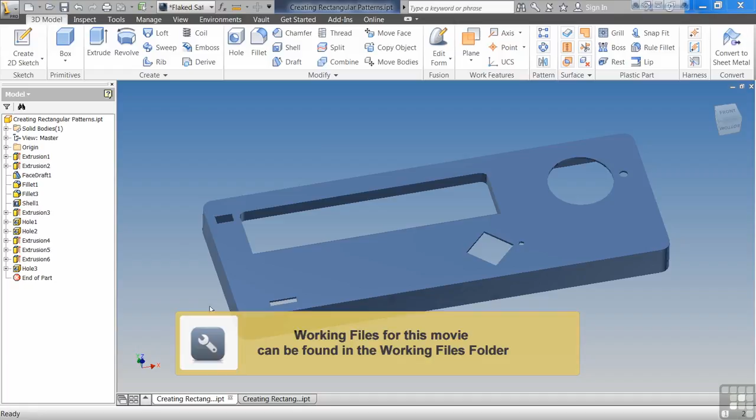In this exercise, we're going to be discussing creating rectangular patterns. Rectangular patterns are part of a feature reuse series where you have rectangular patterns, circular patterns, and mirroring. It's been attributed to Picasso that good artists borrow and great artists steal, and it's the same for your work inside of Inventor. If you take the time to draw something out, why draw it out all over again when you can just pattern it?

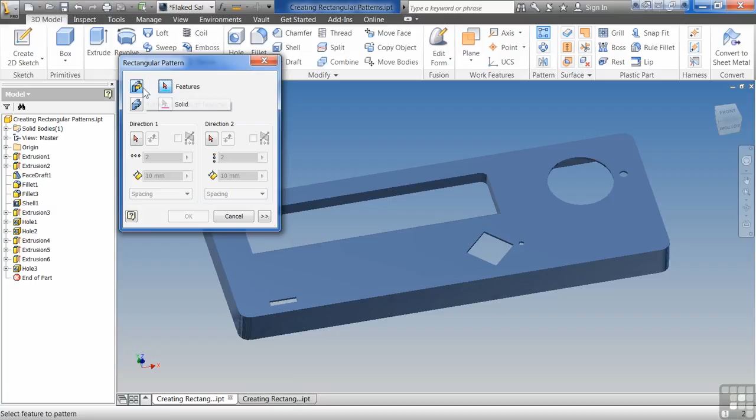So let's get started. Pattern command. You have the rectangular pattern appear at the top, once again top to bottom, left to right. You can either pattern the individual feature or you can pattern a solid. Most of the time, we're going to be patterning an individual feature. So we'll come down here and we'll select rectangle here.

Then it asks for a direction. One tip to you is grab something that's easy to get a hold of. To me, this line here is much easier to grab than some of these rounded edges. So I'll grab this line up here. You'll notice right away that it went in the wrong direction, the little arrow's going the wrong way. So I can just flip it and it'll say, hey, go this way.

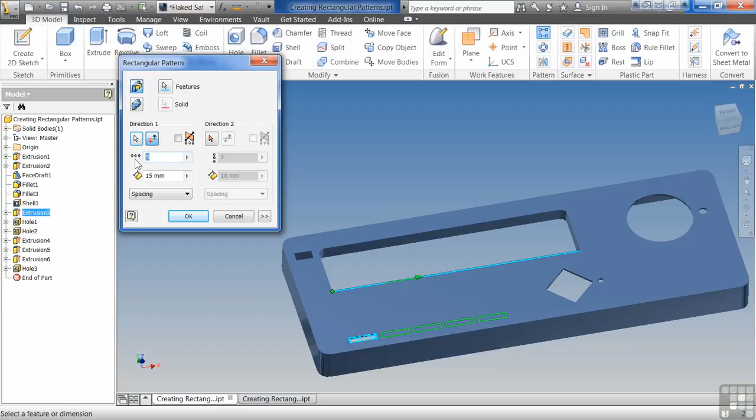And I'll put in, say, 15 millimeters. Then I can decide how many of these little rectangles I want, say 5, 6 rectangles here. Then I can go on to the next direction, say 4, and I'll drop this down to 8 millimeters. So now I have all my buttonholes that I want to put in here. I'll say OK. You can see how easy it was to create that pattern.

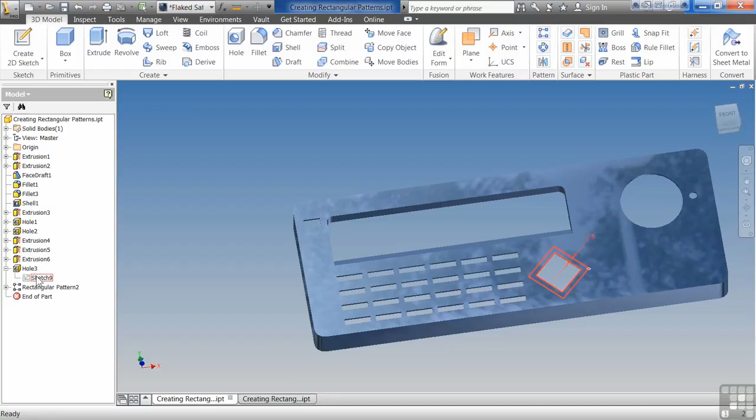The next thing I'm going to look at is the hole for this sketch here. I'm going to turn this on so I can see it, zoom in here, and use the rectangular pattern again. I'm going to select this hole. And for my direction, I'm going to select this rectangle.

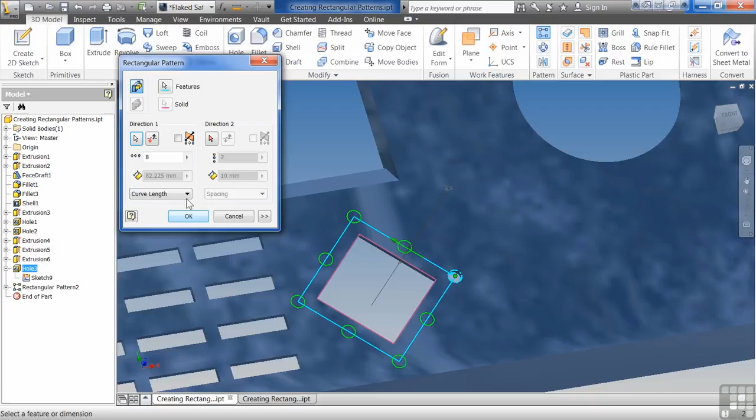So you can say, okay, that's not too bad. I'm going to say 8, and looky there, instead of going in one direction, it actually kind of goes in a circle. I'm going to say curve length. What that basically does is it says pattern along this object and evenly space 8 of them. Hit OK, and so now I have this pattern going around this rectangle. What's really wild about it is it's not even just a rectangle, but it's also a diamond.

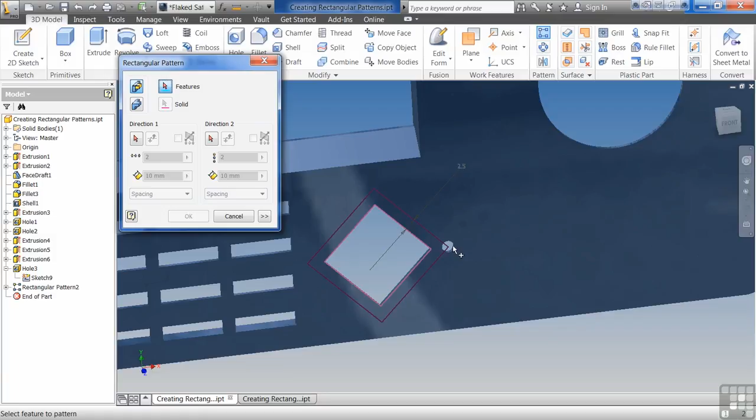So this is at an angle all the way around. I'm going to undo this for a second, and redo it again just so you can see what I did. So I click on the hole, and then for the direction, I pick on the rectangle. Now, I did this on purpose.

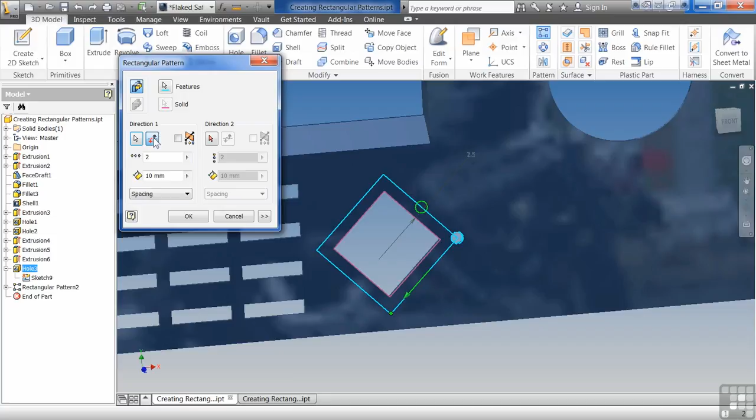I wanted you to see what happened whenever I click down here on this rectangle. What happens is basically where the starting point of the geometry is. Being down here, it doesn't like it. So I just have to flip it around here. And you can see it still doesn't like the way it's going. For whatever reason, sometimes your rectangle, like the origin of it, doesn't like it.

So then what I'm going to do, instead of selecting down here on this direction, I'm going to come up here and select up here. Change it over to curve length and we're done. I wanted to show you that sometimes whenever you click on objects, it doesn't work correctly just because of the direction it's going for whatever reason. So sometimes you do need to deselect and reselect for curve length pattern. It's a little bit trickier, but it's not the end of the world. So if it does mess up on a different object, go through and change it out again.

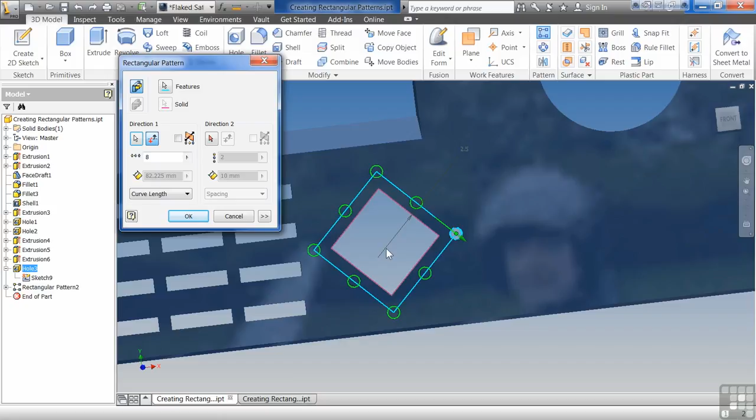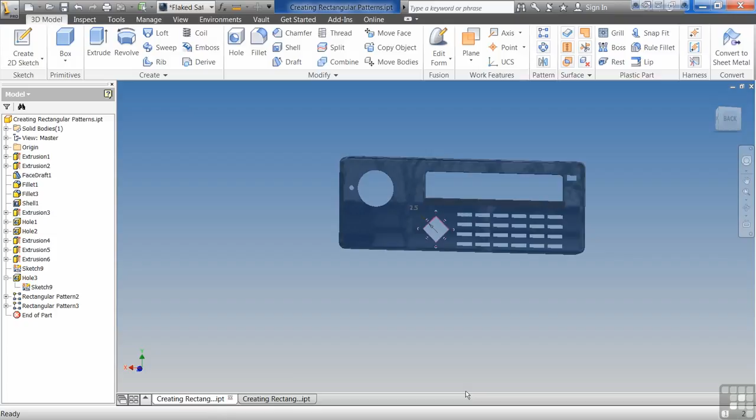You will notice that the chrome pattern looks a little weird. Little Easter egg here for you: the chrome pattern is actually a picture of the Lake Oswego or Portland, Oregon office of Autodesk. So you can see what their office looks like, their parking lot, just by looking at a chrome pattern. One release, it was like the woods. See this one, there's actually a guy sitting on his motorcycle.

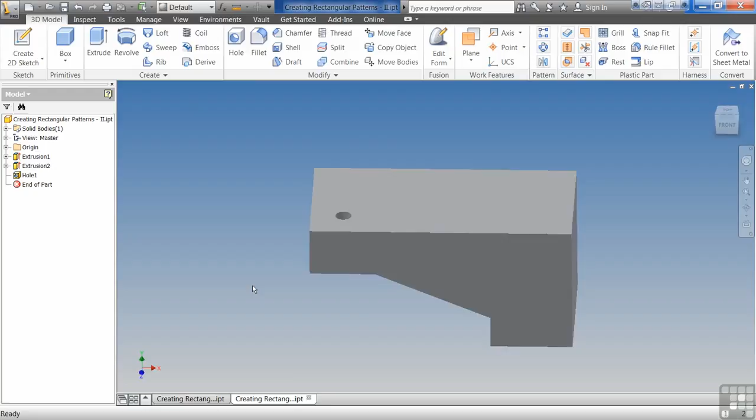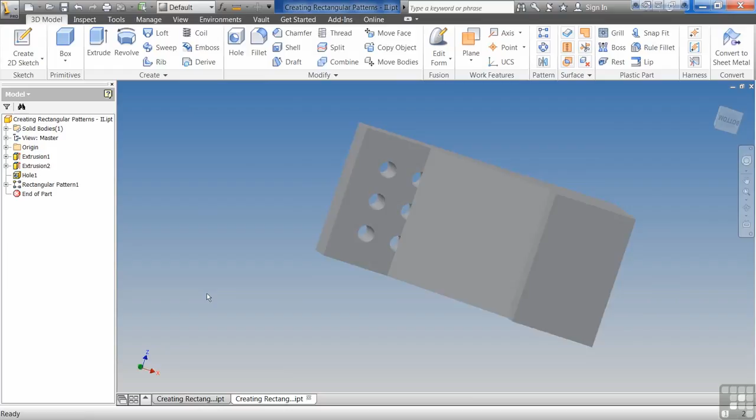One last thing here is there were additional options I didn't show you in patterning because I wanted to come over to this part. Say this direction, I will go 6. This direction, flip around here. Let's do 3, so I have the double arrow. Right now I have it set to identical. If I hit OK, see what'll happen is my holes don't go all the way through.

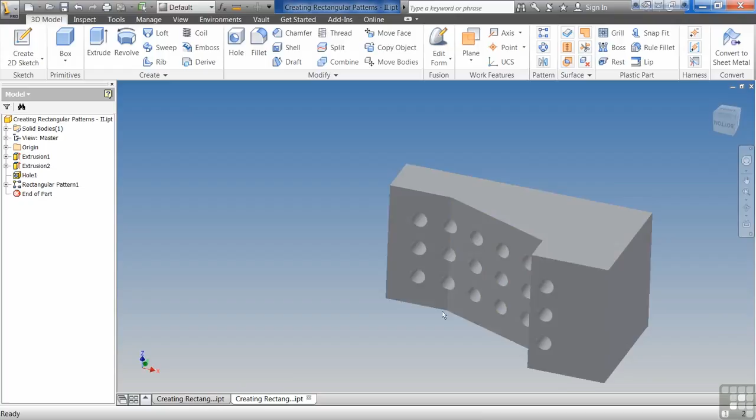Because what it's doing is it's giving me the exact same hole as the original hole. The original hole is through all. So what you have to do with your rectangular pattern is come in here and tell it to adjust. You say okay with adjust, then what it does is it goes through all. It's a mathematical time saver, so to speak.

So if your part is just like a piece of sheet metal, for example, or flat, then the identical orientation will work just fine. But if it's an irregular shape you want to do adjust. Optimize will actually somehow calculate better if you're doing a large number, anything larger than 50, it will go out and optimize it somehow. I'm not really sure what that actually does calculation-wise, but I've done some large perforations where you're talking about thousands and thousands of holes, and it is suggested that you use optimize if you're doing sheet metal or a perforated sheet.

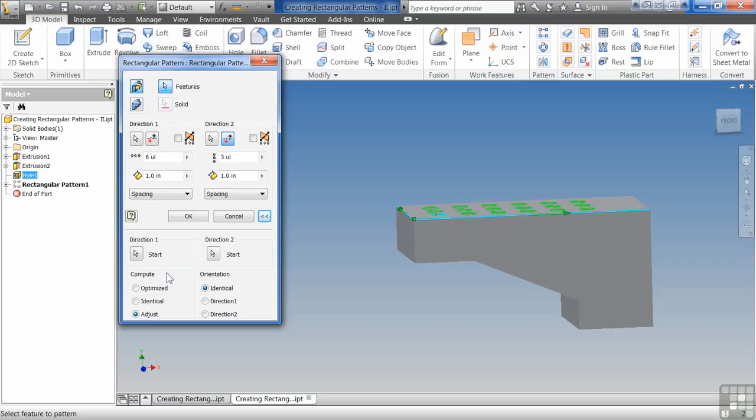The secondary one is the orientation. How do you want it to be orientated? You can adjust it to either identical, direction 1, or direction 2. Most of the time you don't really have to mess with this, this will handle itself. This is more if you have a pattern starting on an angular surface or rounded surface, you can adjust it. The majority of the time, the only one you really need to watch out for is whether you want it to adjust or be identical. Situation like this, we want it to adjust. So now we're good to go, we have our pattern in there.

This object is going to be Creating Rectangular Patterns II, and the other object to play along at home is just going to be creating patterns. Play along with this, see what you can do, and have some fun. Don't overthink patterning, don't try to overpattern, but definitely utilize it in your designs. Reuse features whenever possible.